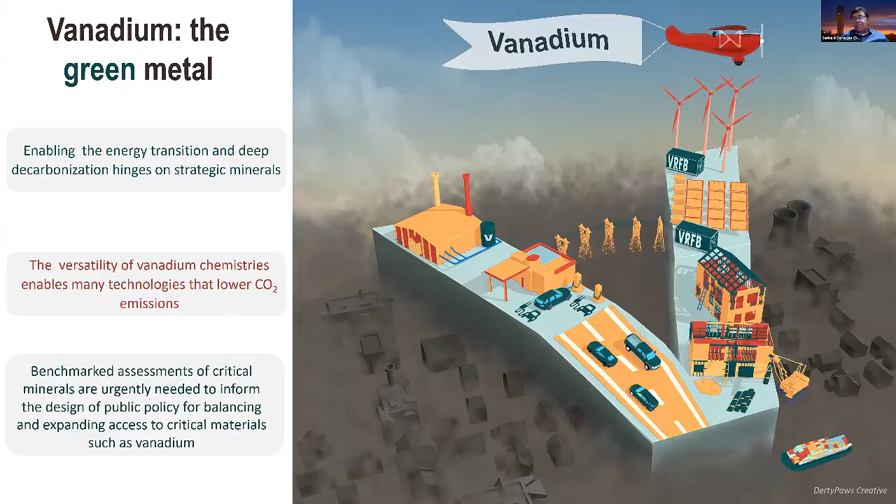Sometimes these technologies are in a bit of conflict, and sometimes there are great opportunities to enjoy synergies across different industries. So I'm going to give you a brief perspective of what we've been studying. Part of the idea is that benchmark assessments of critical materials are urgently needed to inform public policy, so we can expand access to vanadium and ensure a supply for both old industries and emerging new markets—many just coming up on the horizon, especially in energy storage. Vanadium has a critical role to play in the energy transition moving forward.

I wanted to start by talking a little about the role of vanadium. Many of you are very familiar with this, but in case not: more than 100,000 metric tons are produced annually. It's very deeply connected to the steel industry—most vanadium is produced as a byproduct during steel production. There are some primary vanadium mines going online in Brazil and South Africa, and hopefully soon in Australia and China as well.

This is the outlay for how vanadium usage currently breaks down. You can see a massive amount goes into steel. Some goes into titanium alloys, mostly for aerospace applications, some into the chemicals industry, and an increasingly large share goes into energy storage. Primary production of vanadium is still kind of small.

Co-production with steel is very large, and secondary production is over here. But this will be changing as more countries come onto the map. China has pretty large vanadium production, as do Russia, South Africa, and Brazil, but many more countries are coming on board, including Australia, Finland, and Kazakhstan, which will have significant vanadium production as well. The three biggest use areas right now are construction steel, automotive steel, and redox flow batteries—those are probably the biggest.

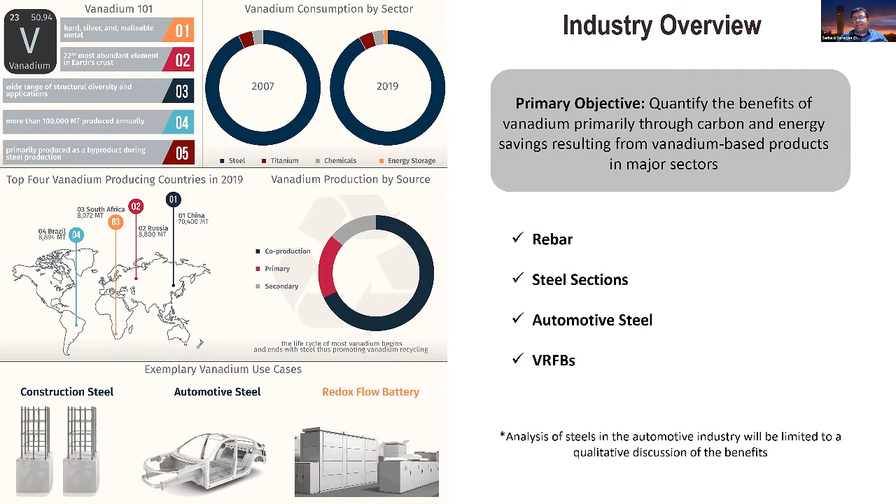Given the scope of the conference, I'm going to focus mostly on rebar and steel sections today. I'll spend a bit of qualitative discussion on automotive steel, and if I have time, I'll quickly go over some data on VRFBs. But this covers about 90% of all vanadium production.

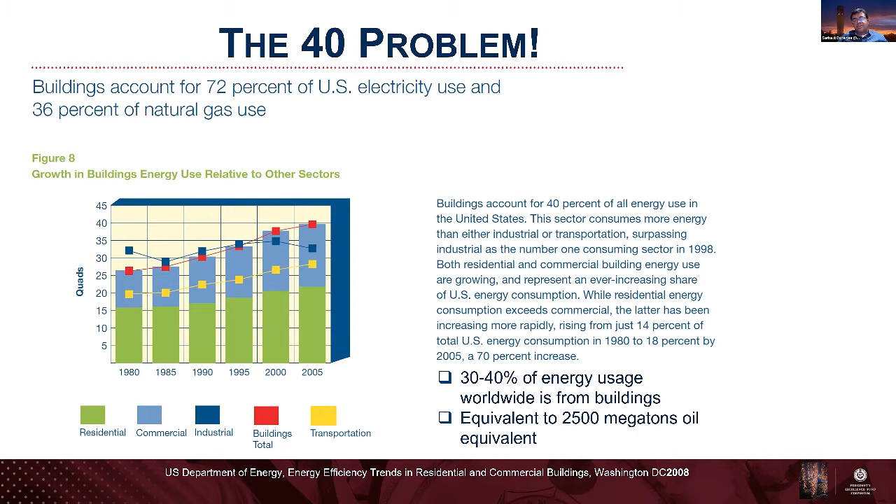So, to take a step back—why do we care about this? It's what we call the 40% problem in the United States: the built environment consumes about 40% of all energy, more than industrial or transportation. This number hasn't gone down, despite worldwide energy usage from buildings being about 30 to 40%. It hasn't really been something easy to tackle. In the US, buildings account for 72% of electricity use and 36% of natural gas use. This is really a large challenge.

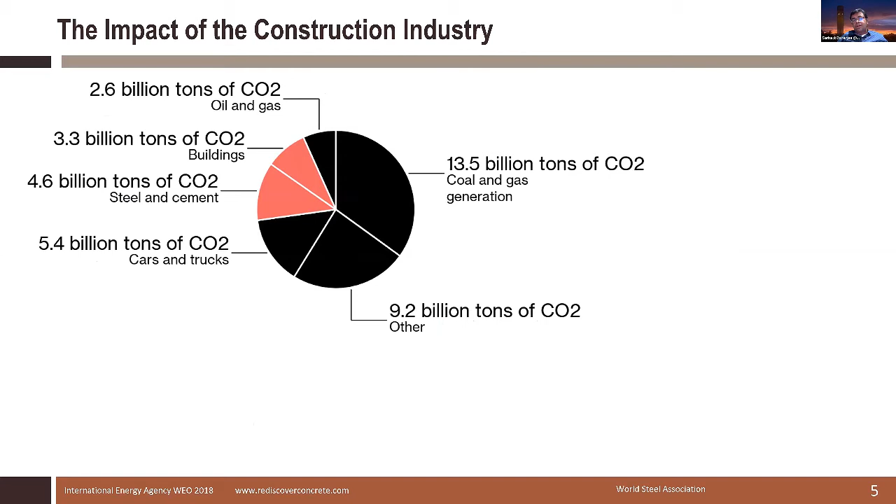Now, it's no surprise—I'm going to show this here—the impact of the construction industry: 2.6 billion tons of CO2, 3.3 billion tons of CO2 goes into buildings. And it's no surprise that you can see here that concrete has...

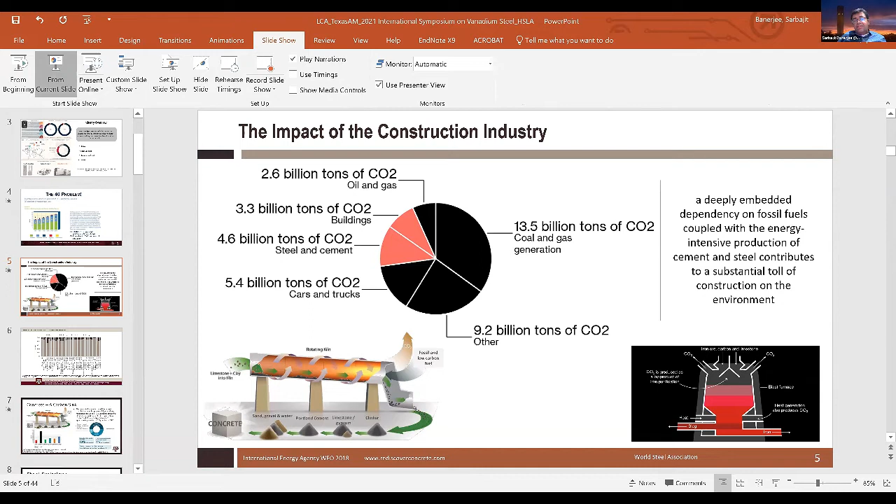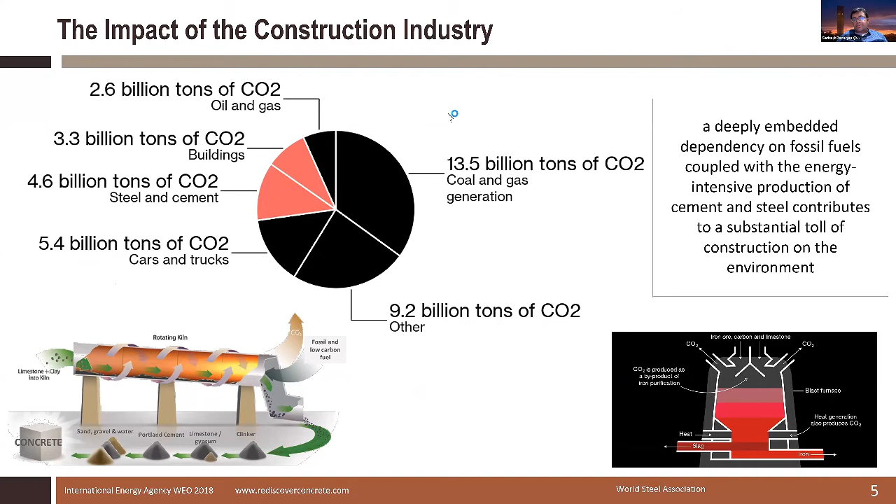Hello, we couldn't hear you. Hello, give me one second, I think my Zoom crashed. Okay, sorry about that. I don't know why the Zoom crashed.

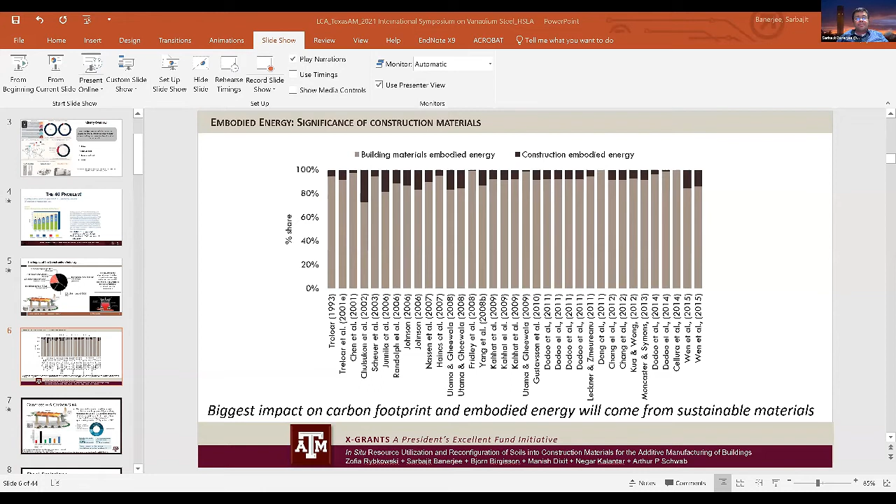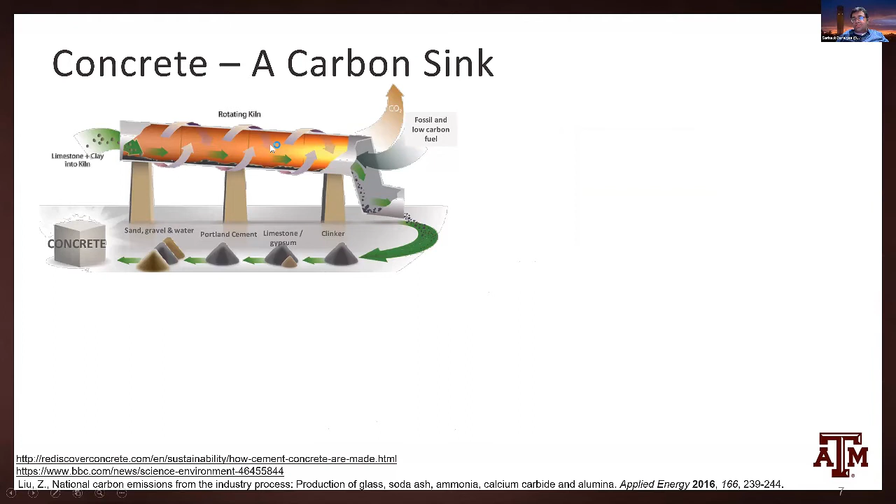So the biggest impact on carbon footprint and embodied energy is coming from the materials that are used, the choices there. Concrete is a big part of this. The concrete industry is one of the biggest, responsible for about 5 to 7% of global CO2 production, from quarrying and transport. Construction related spending accounts for 30%.

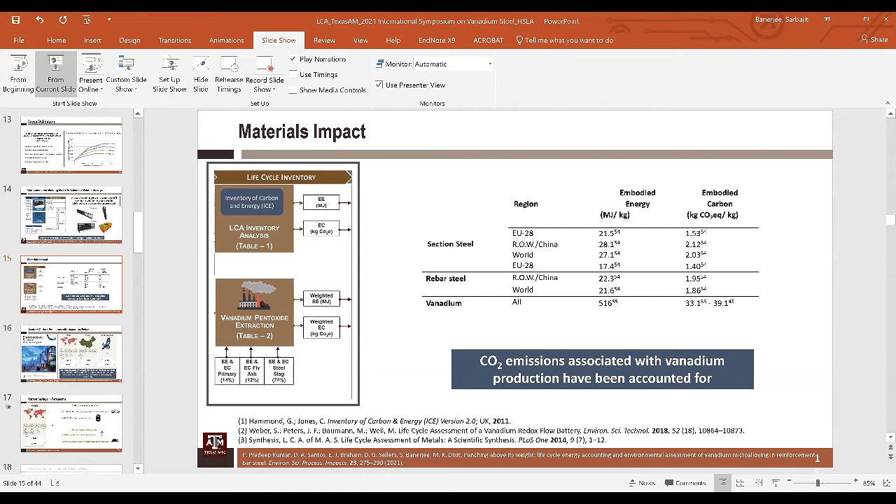Hello. Okay, let's wait a moment. Hello, Dr. Sarbajit Banerjee. Yeah, sorry, I don't know why it keeps crashing. Can you hear me? Now it's okay, can you see my screen? Not yet, okay let me share. I'm getting, okay, alright, okay, give me one second. No problem, take it easy. Yes. Okay give me one second and I will share. Okay, from current slide. We couldn't see anything. Is it working now?

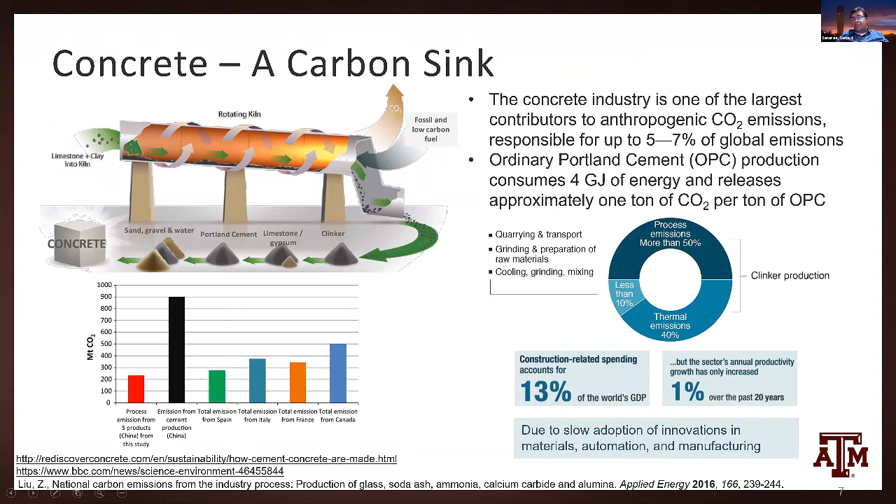Now it's okay. So concrete is a big carbon sink, and this has been a big part of this. 13% of the world's GDP is tied up in construction, but the productivity of the sector has only increased by 1%. This is a real problem because of slow innovation in materials, automation, and manufacturing.

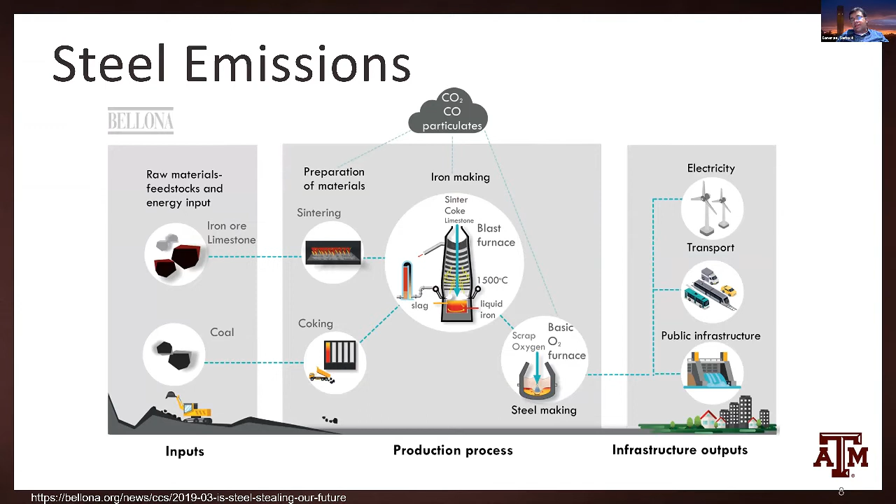Steel emissions are also very large, as many of you know well. This is a huge problem, and it comes from the feedstock, the preparation of materials, iron making.

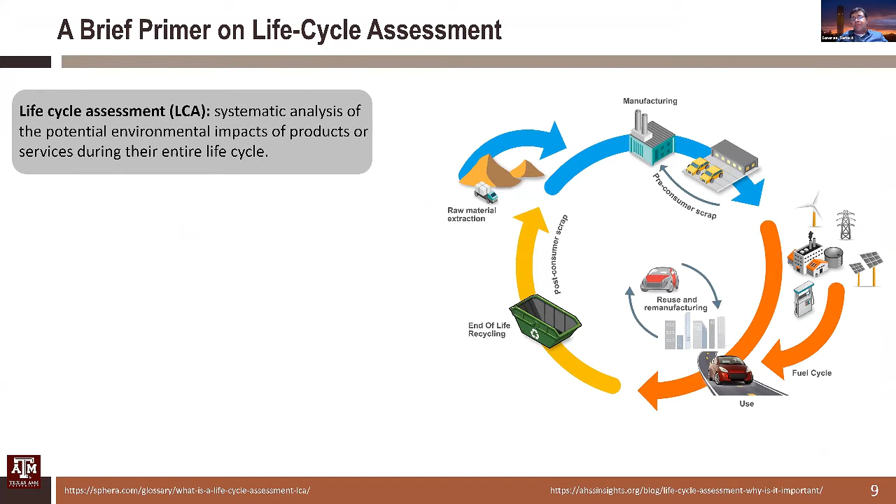What we've done a lot of work on is life cycle assessment, a systematic analysis of the environmental impact. We've carefully selected the system boundaries as per ISO standards, defined functional units, and performed an inventory analysis. We've had a lot of help from Vanitec member companies, acknowledged here, and from CISRI, in coming up with the deep dive into data needed to generate good numbers.

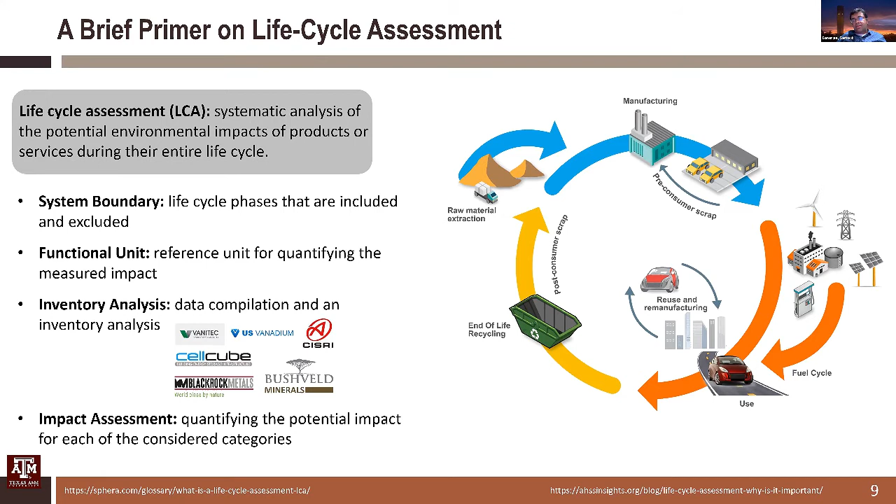We start with some structural modeling, looking at different types of structural steel, either rebar or steel sections. We're looking at vanadium incorporation and how, by incorporating vanadium, you can achieve different grades of steel, and how vanadium microalloying lets you save on the amount of steel required, quantifying the savings in concrete and steel in terms of embodied carbon, embodied energy, and embodied water. Then we can assess the overall impact of vanadium microalloying.

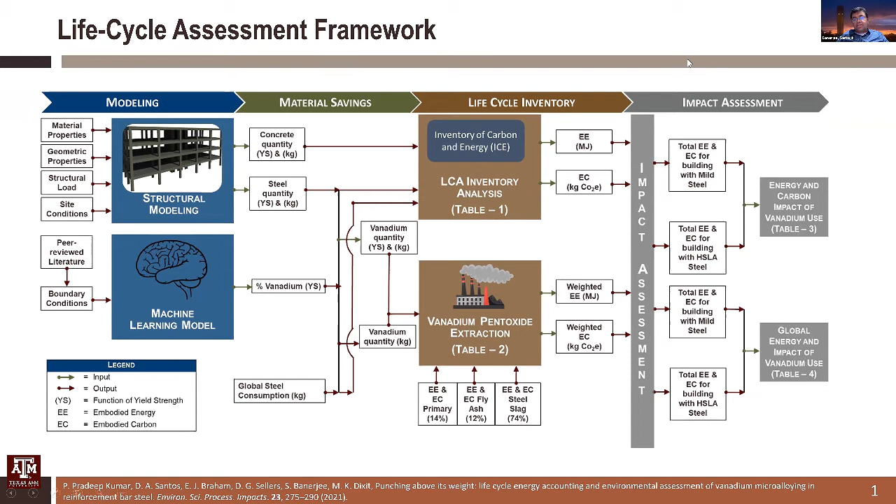So to take a step back, why do we do microalloying? Many people in this audience are familiar with this. The reason we do vanadium microalloying is it strengthens steel through formation of nanoscopic precipitates of nitrides, carbides, and carbonitrides during the austenite to ferrite transformation. Grain refinement is also something you see during the ferrite-pearlite transformation.

The effectiveness is really a beautiful thermodynamic property of vanadium: the excellent solubility of vanadium inclusions in austenite. As a result of the enthalpy of mixing, you have a lot more miscible vanadium in solution prior to rolling, and you can work at some pretty reasonable temperatures. So this is really the reason for using vanadium microalloying.

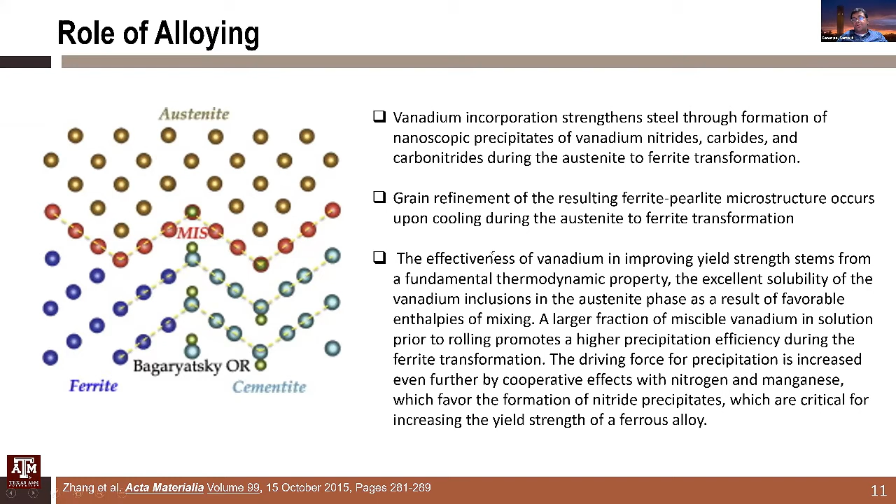One of the things we did is we mined the literature, because as you know, there are many different types of compositions. Each mill has a different composition, and each mill has a slightly different feed ratio.

So we came up with a machine learning model where we fed a lot of primary literature on rebar or steel sections, and were able to come up with models correlating steel composition and yield strength. At different concentrations of manganese or nitrogen, we could develop a multi-dimensional model so that we're not using just the ratio for one company, but using data across the literature.

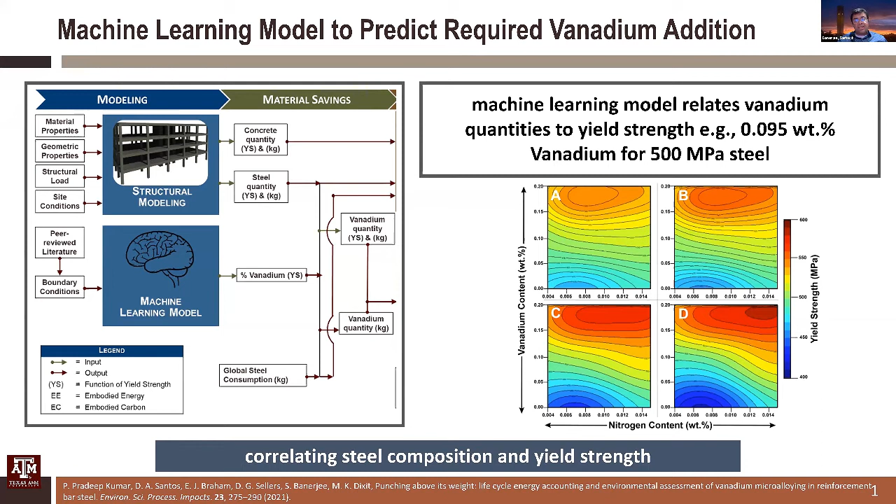So what are the consensus values? We actually came up with numbers pretty close to some numbers Vanitec has reported previously. This is from data from Dr. Glodowski, a consultant with Vanitec, at different nitrogen concentrations. We come up with pretty good agreement with these numbers.

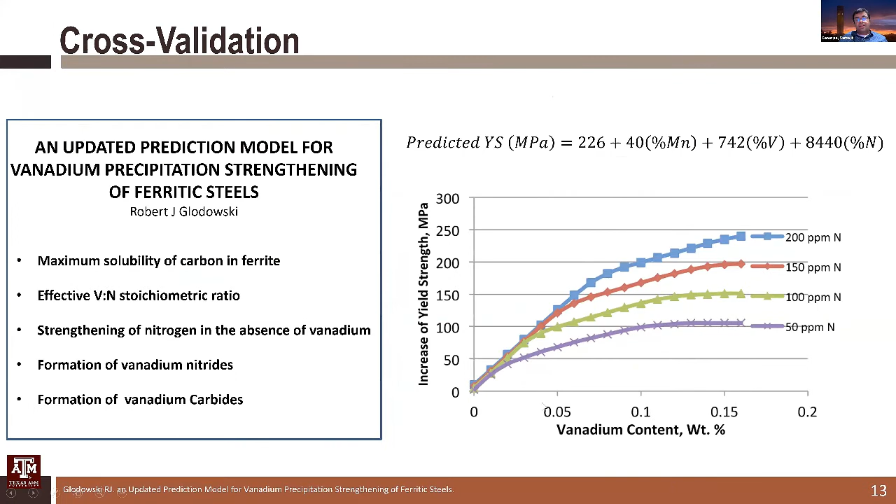So once we have a functional unit correlating vanadium composition and other concentrations to steel's tensile and yield strength, we can then do structural modeling, both at the level of single structures as well as entire building level structures.

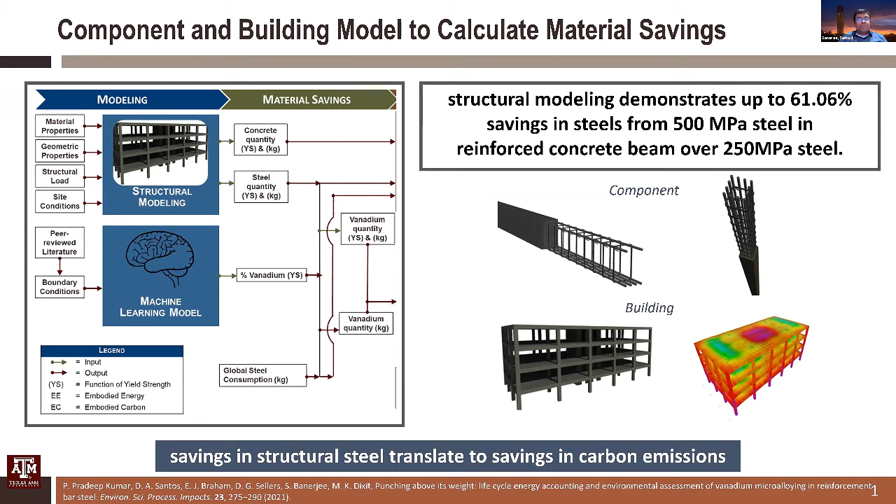And we can figure out the savings in structural steel in terms of vanadium microalloying. One of the things we find is about 61% savings in steel from using 500 megapascal steel in rebar as compared to 250 megapascal steel. This is pretty large, because by using 500 MPa steel, you can design the building very differently and still have the same load-bearing properties and seismic resilience, but use much less steel and rebar, which can translate to significant savings in carbon emissions.

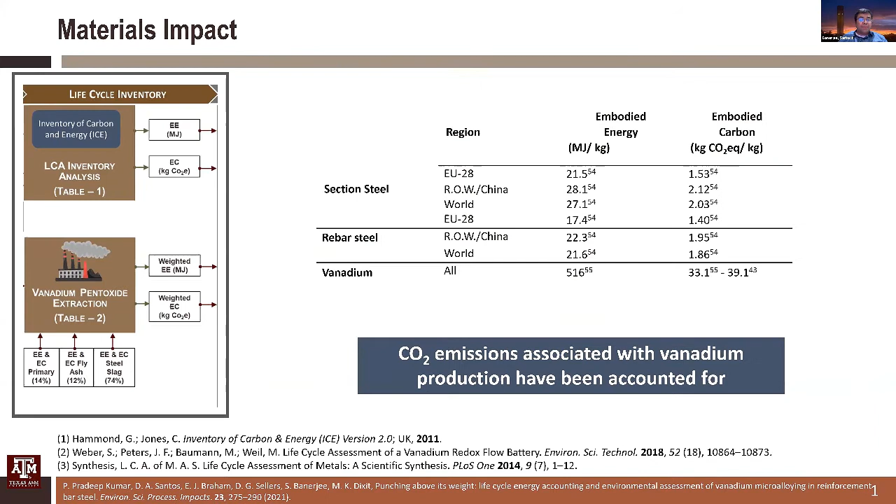We do account for CO2 emissions associated with vanadium production, and we have some pretty good numbers on this. I have to point out these numbers are relatively large, 33.1 to 39.1 kilograms of CO2 per kilogram of vanadium production. This number is rapidly decreasing as vanadium manufacturers adopt greener extraction methods, going significantly lower, down to even single-digit numbers for some new vanadium facilities coming online. As a result, just from rebar, if you extrapolate these numbers and complete this entire framework, we can show that vanadium microalloying, even though it's a relatively small amount, less than 1%, results in about 0.38% global reduction in the total fossil fuel carbon footprint.

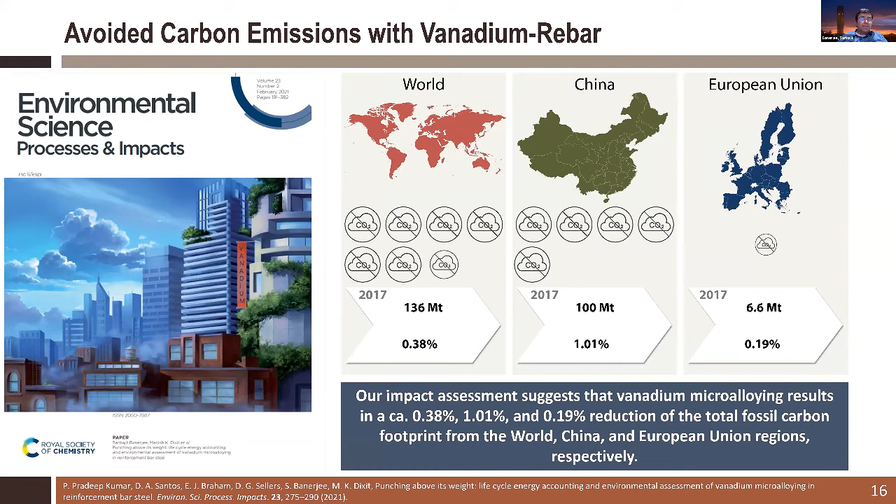And a lot of this is coming from China. Now, I understand that ultimately a lot of this is coming from China because we see... one second, audio feedback.

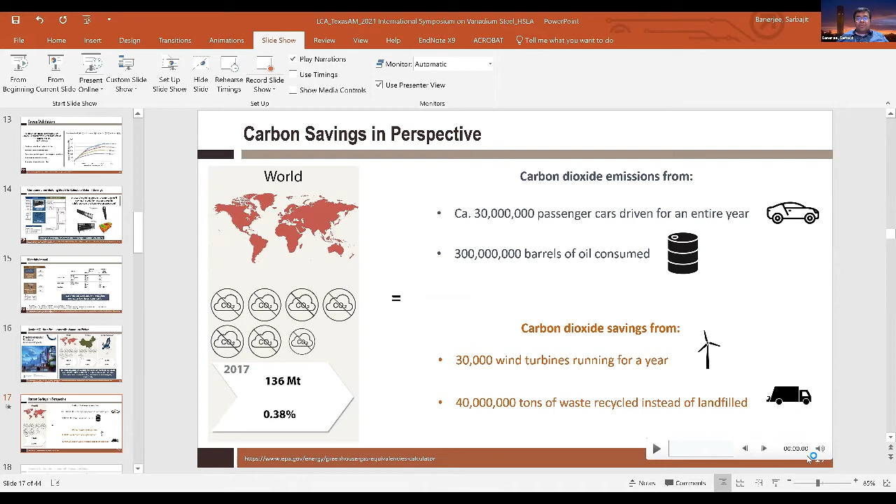Did I get rid of that? Can you hear me? No. Okay, now it's okay. Okay. All right, perfect.

All right, so something I think is really exciting: if we look at the use of vanadium rebar in China, most of you know the story very well. In 2008, the Great Sichuan earthquake led to a series of changes that have had a massive impact on the worldwide vanadium market, and of course the Chinese rebar market.

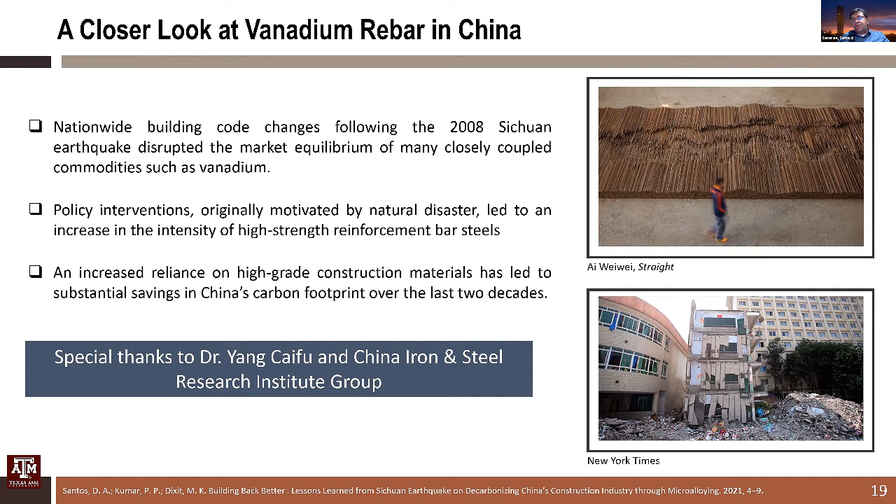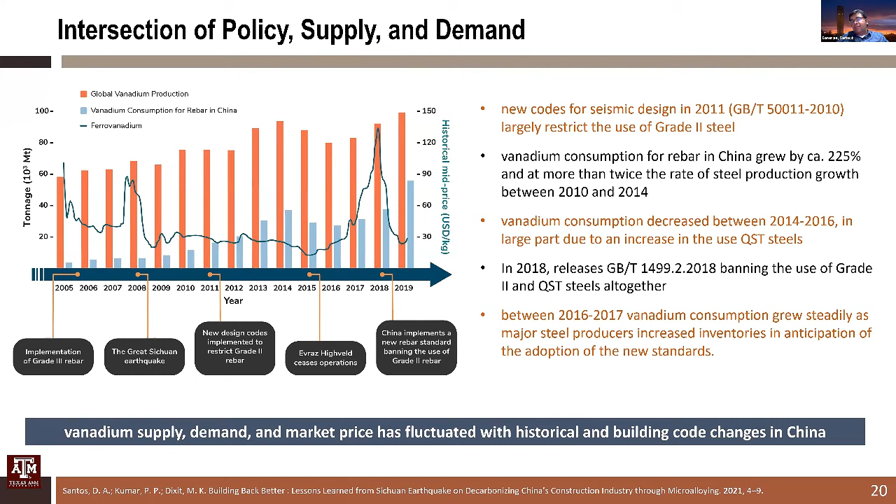If you look at the details here, each of these price spikes correlates with the implementation of the new rebar standard, and before that, the previous guidance on grade 3 rebar. So vanadium supply, demand, and market price have really fluctuated with historical building code changes. Much of this is driven by China, but it has also been a huge driver for the vanadium industry across the world, and this is a great thing.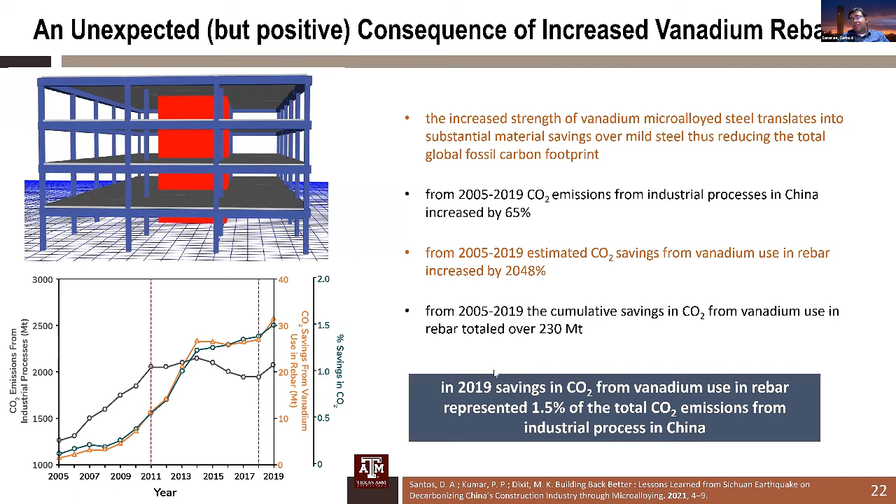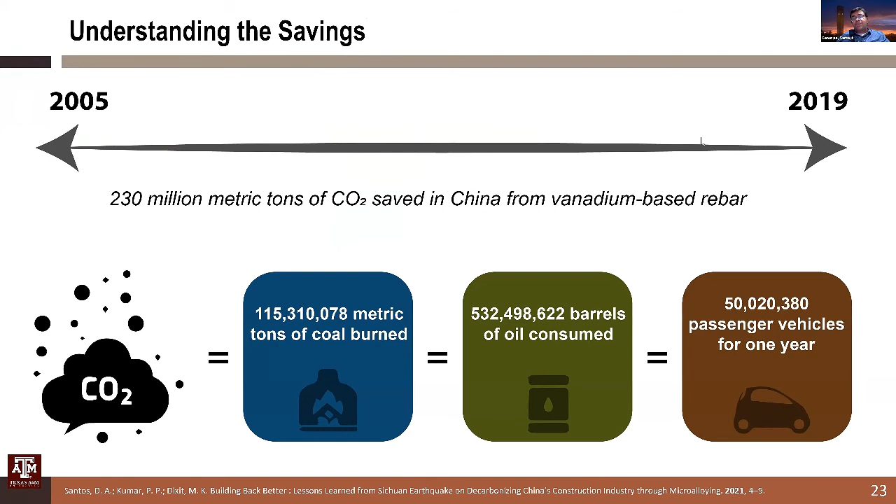And these are some ways to benchmark it: about 50 million passenger vehicles per year, if you think about the volume of the savings here.

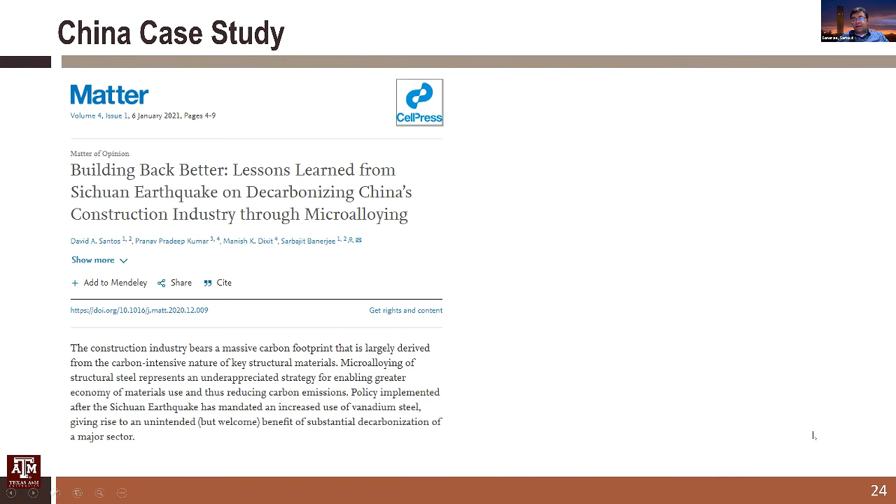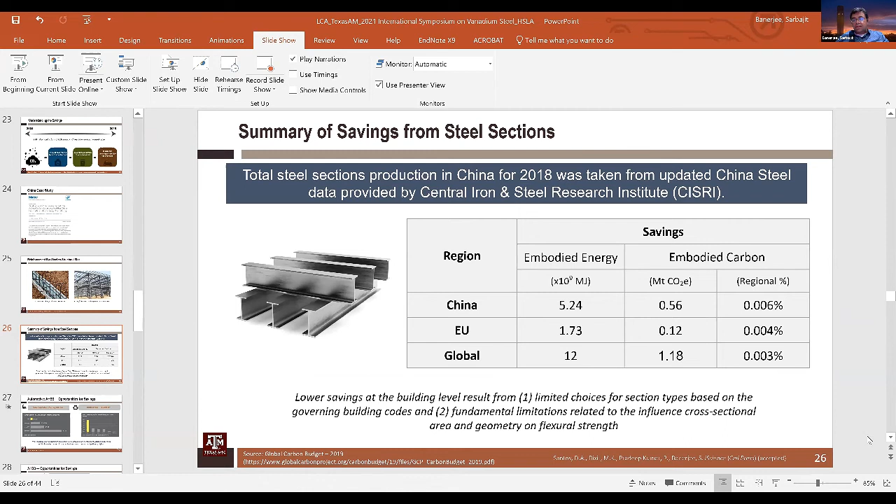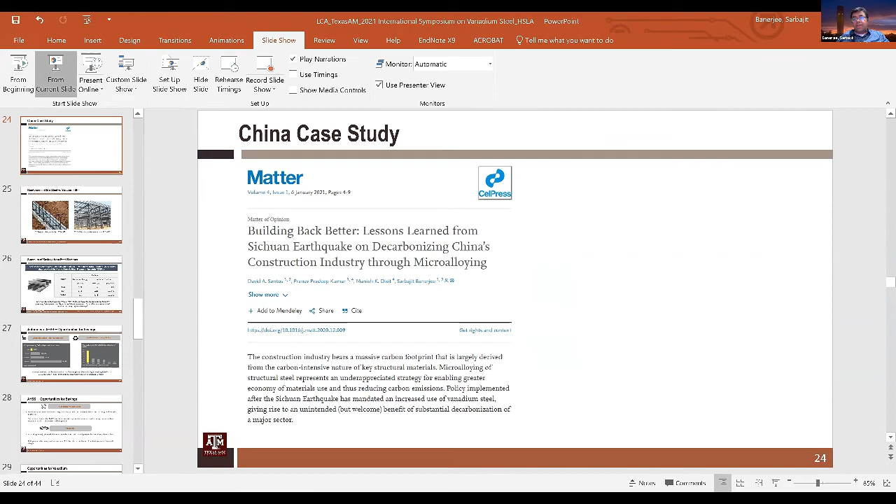Okay, and you can see here, then we also have similar data on structural steel. Again, it's not as big of an issue there. We see some pretty significant savings in structural steel, and the structural steel savings there's limited choices for section types, and there's some fundamental limitations related to the influence of...

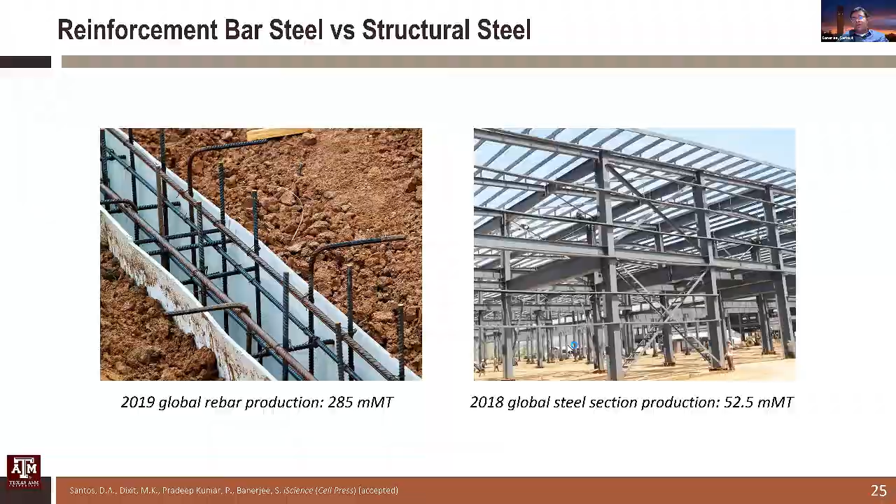Hello, we couldn't hear you. Give me one second, I apologize. This keeps dropping. Okay, no problem. Yeah, let me fix this. I think there's something about the PowerPoint format it doesn't like, but I will fix this and I'll be back in one second. Okay, no problem. Okay, thank you for your patience.

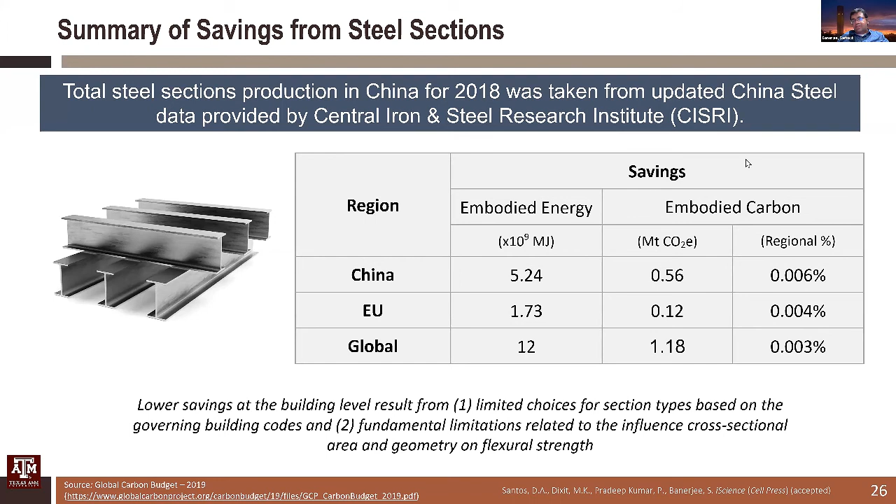Okay, so steel section, this is data provided again by CISRI, and we can look at the embodied carbon and embodied energy. This is a relatively smaller number than the rebar because, as you know, there's relatively limited section types that you can use, and there's some fundamental limitations. You cannot completely minimize the steel in a steel section building the same way you can in rebar, right? So the effect on steel section is relatively smaller, but still a significant amount in terms of megatons of CO2 production.

So this is, I think, a really great story for rebar, and we published a few articles on this. Another emerging area where vanadium is saving a lot of carbon, it's a little bit more difficult to quantify, is in advanced high strength steels for auto applications. Now, there was a big push, as you know, towards carbon fibers, aluminum and magnesium, but the embodied carbon, embodied energy of these aluminum, carbon, and magnesium are very high, and steel can be fully recycled at the end of life. So I think there is a really great benefit to using advanced high strength steel.

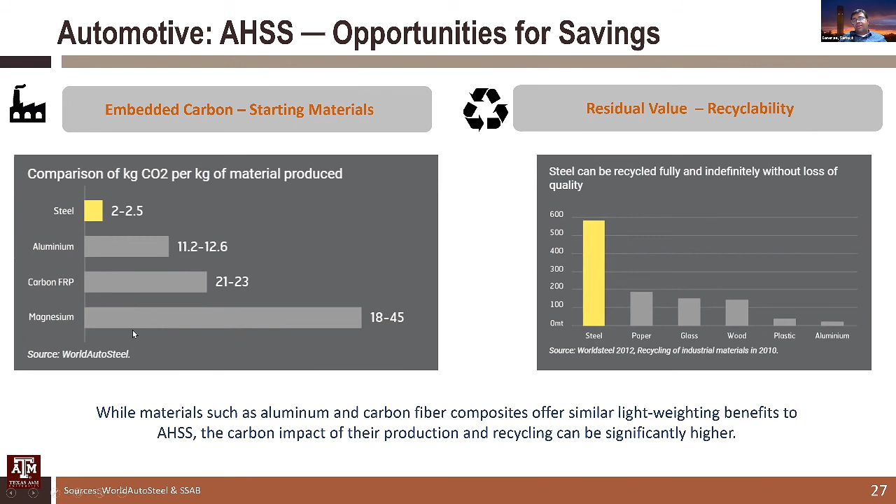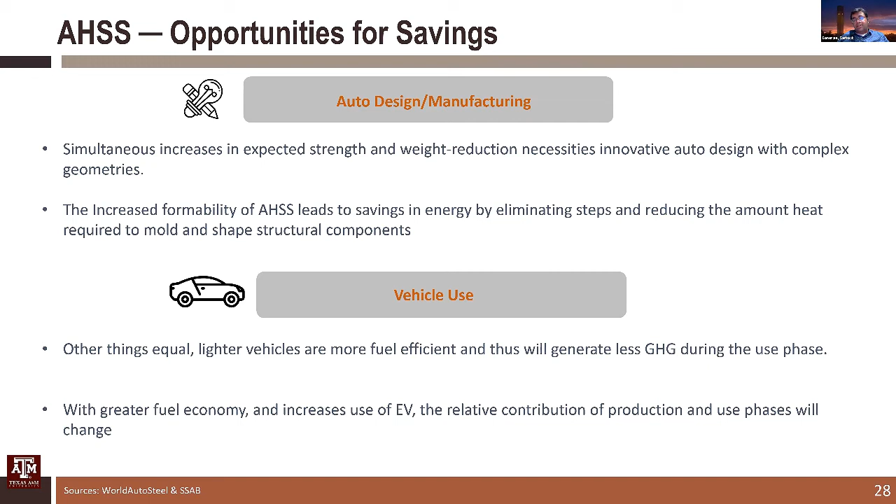And it's expected, it's a little bit difficult to quantify because you expect not just strength and weight reduction gains, but also interesting designs that become possible by using advanced high strength steel that you may not have had otherwise. And the increased formability of AHSS leads to savings by eliminating steps and reducing the amount of heat required. So other things being equal, lighter vehicles made of AHSS will be more fuel efficient and will generate less greenhouse gases, right? So this is what we're excited about.

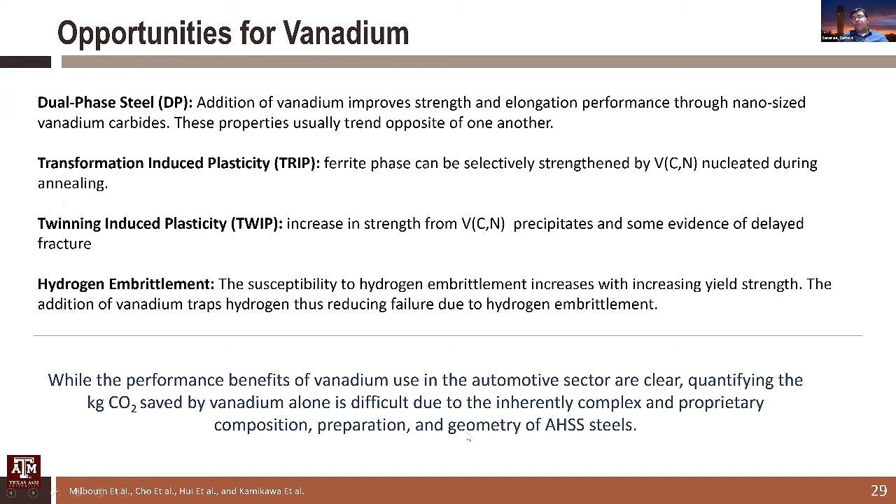And there's really a lot of opportunities for vanadium in dual phase steel, transformation induced plasticity, twinning induced plasticity steels, and hydrogen embrittlement. So there's clear benefits of vanadium use. It's a little bit more difficult to quantify as compared to construction because of the proprietary nature of the steels and the very vastly different areas in which it is used.

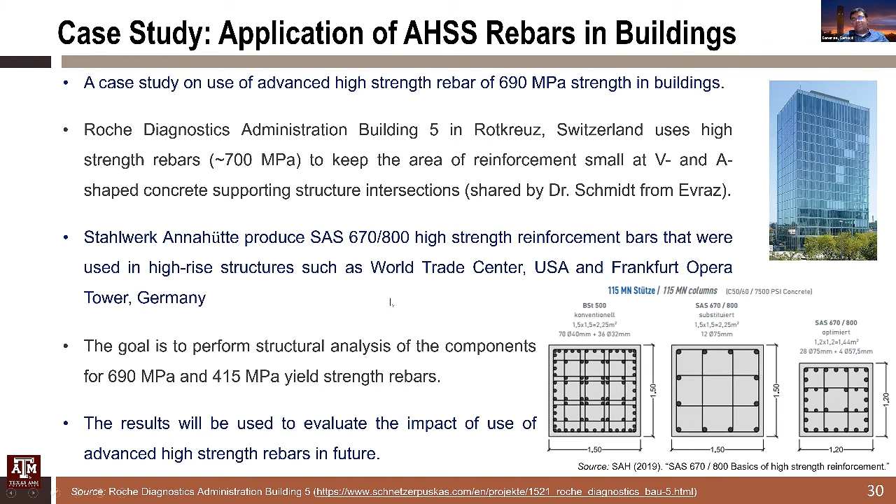And so looking forward to buildings, I think we're also very excited about these very high strength steels that are coming on the market, 700 MPa, even 800 MPa steels. This is the Roche building in Switzerland, an example of this, where we are able to see some really interesting architectures that become possible when you have very high strength rebar. And the challenge is that many commercial building softwares cannot handle it, so we have had to come up with our own designs.

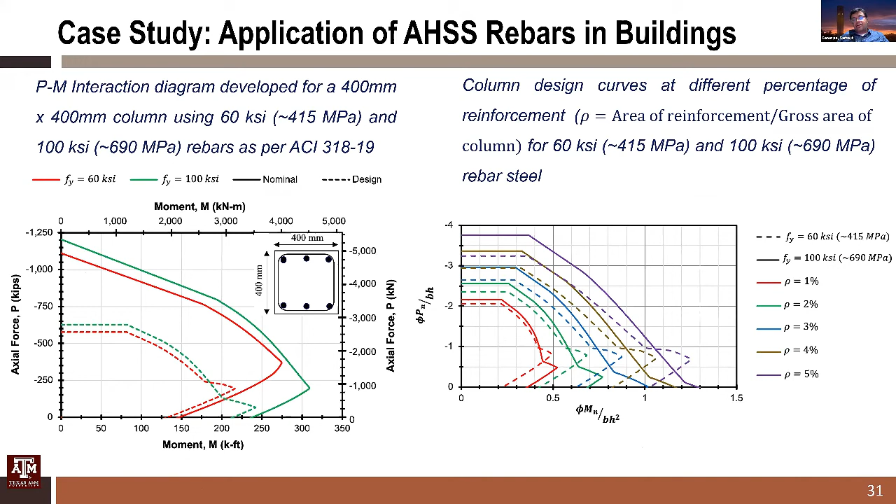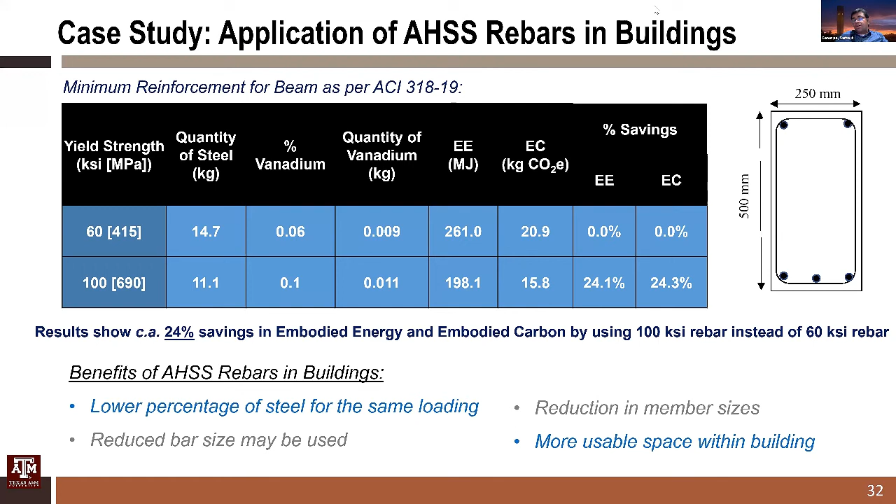This is an interaction diagram that shows the load bearing capacity of some of these parameters and how sensitive they are, and this allows us to start looking at this. And as you can see, for 690 megapascal, we can see even a 24% savings, even above the 415 megapascal, in embodied energy and embodied carbon. So not just the fact that we have less steel, we're also seeing in some of these new advanced buildings in Europe very interesting architectural designs, more usable space, more daylighting, reduced bar sizes, and reduction in member sizes. We're seeing all of these benefits from vanadium microalloying, and this is becoming more and more popular.

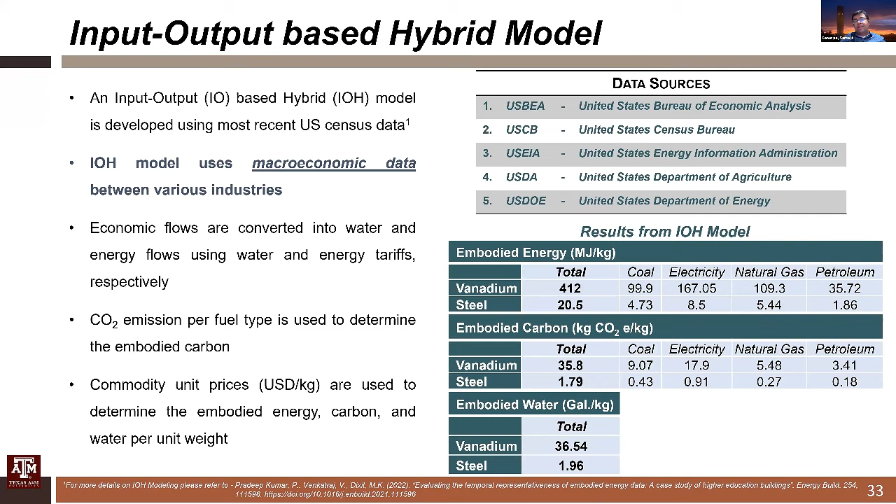Just to give you a brief introduction to some of the work we're doing now, we're moving towards an input-output based hybrid model. Instead of an LCI inventory model that we were using, we're using macroeconomic data for vanadium and steel and such. And one of the things that has come out of this is a really great indication of how much water usage is saved by vanadium microalloying, and it's also very significant.

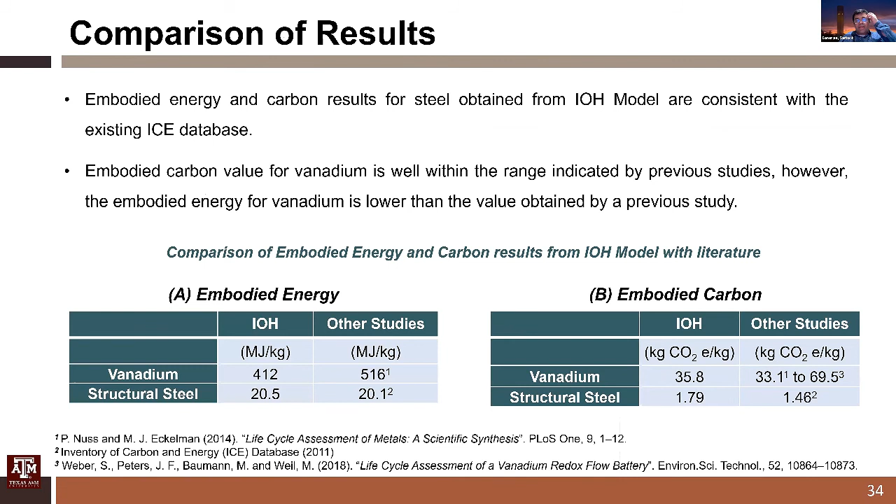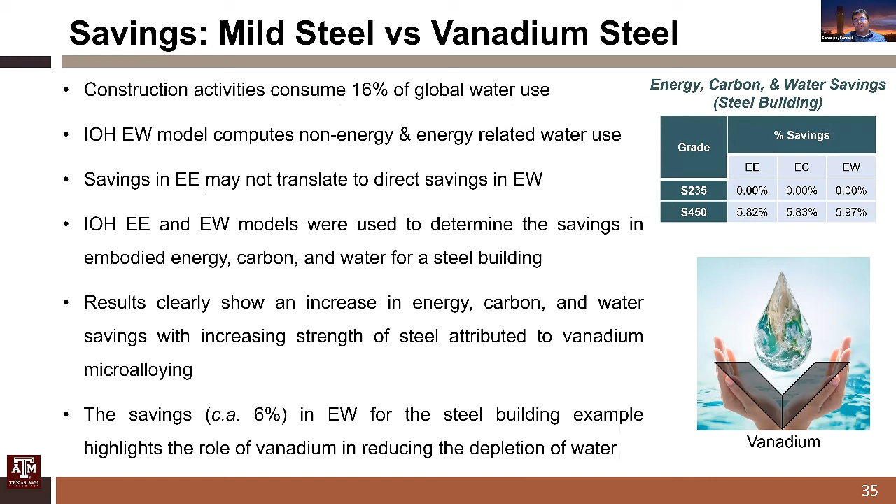So we end up, again, these are some examples of embodied energy and embodied carbon. And we end up seeing actually that the savings in embodied water for steel is about 6% as compared to non-alloyed steel. So there's a pretty large benefit in this.

So these are some articles we have published. If you're interested, please feel free to take a look or take a picture, and these slides will also be recorded and made available. Environmental Science Processes and Impacts - this is an article that we published that has a detailed accounting of the rebar story, the Sichuan earthquake story. I think this is an article written for the popular press, just sort of trying to explain to the research audience how Chinese rebar has really made a huge dramatic improvement in the last 15 years, and how much of an amazing transformation it has enabled in the Chinese construction industry and in reducing the carbon footprint of the Chinese construction industry.

So it's a great story. This is in Matter, and we have recently published the iScience, a comprehensive look across the board at every type of application of vanadium, both in buildings, auto steels, and also in some emerging applications.

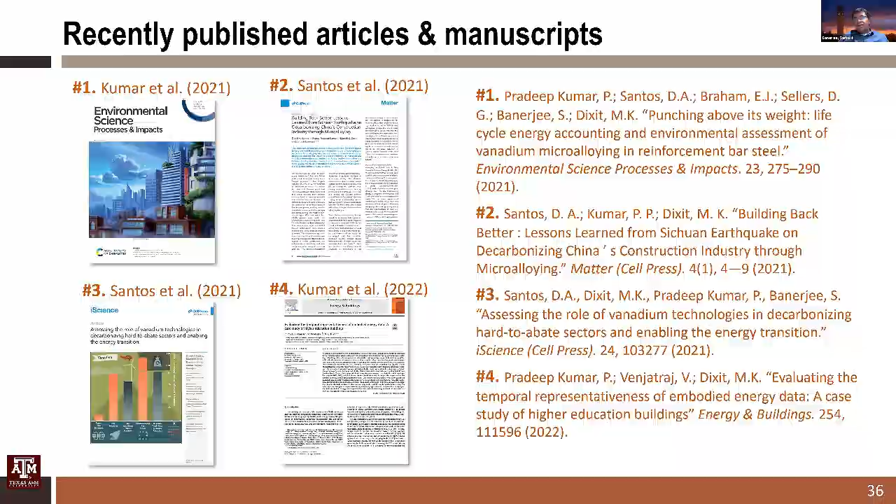And then this is our input-output model, the macroeconomic model we've been looking at. Where we are focused now is really looking towards vanadium redox flow batteries. The price fluctuations I showed you before had a major impact on the adoption of redox flow batteries, because people really need stable prices for that.

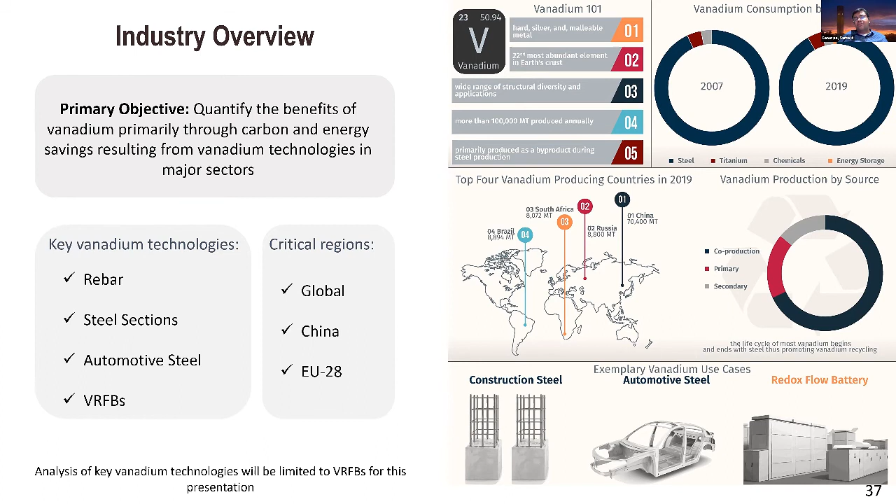And redox flow battery capacity is currently still a little bit small. Vanitec maintains a worldwide database that we're helping them maintain. It's only about 2.13 million metric tons currently, but this number is going to grow.

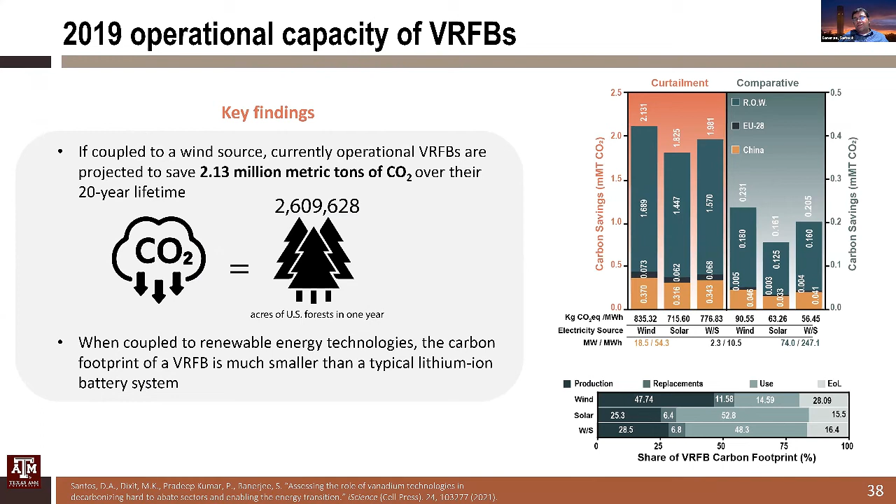And VRFBs are a key part of coupling to wind and photovoltaic especially. This is an example of how many megawatts - you can see we're really poised for dramatic growth in VRFB production.

And again, this is going to lead to some tension with the steel industry, but hopefully the tension will be short-lived. Hopefully there will be new opportunities for vanadium, expanding vanadium access in the industry in years to come, that will allow for some synergies between the old and the new.

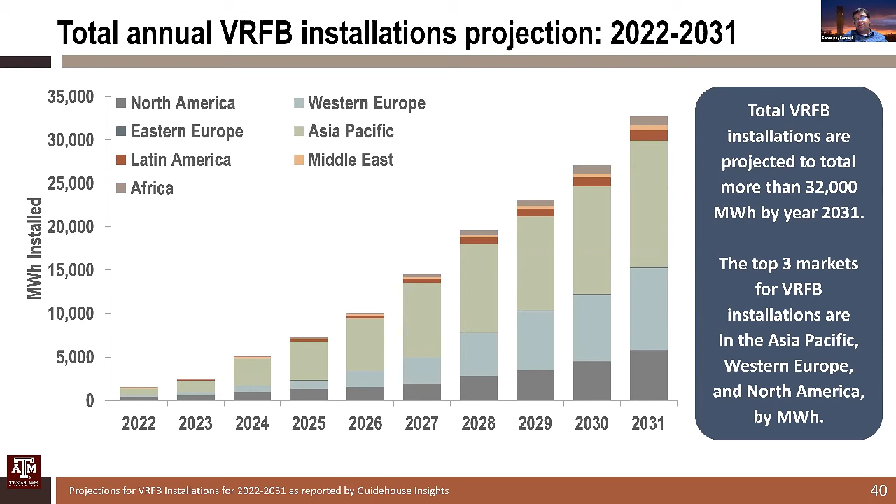I don't want to go over every point, but the environmental impacts have been compared. We've taken projected capacity from Guidehouse, and assuming there are some challenges with VRFBs, the capacity are relatively low, but we can quantify the benefits.

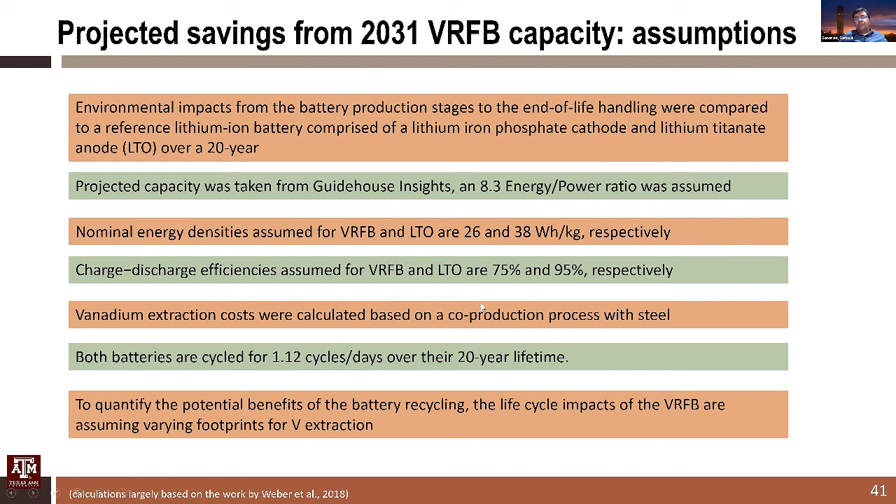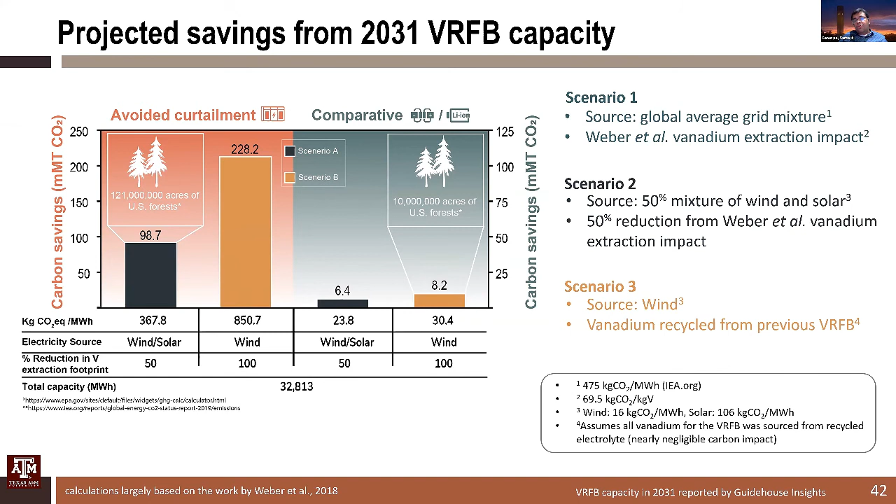As you can see, in the future, assuming 32,800 megawatt hours capacity, we're going to start to see some very significant carbon savings, especially in the scenario where there is no storage, which is really the current situation, where for most wind and for most solar, there's no storage whatsoever.

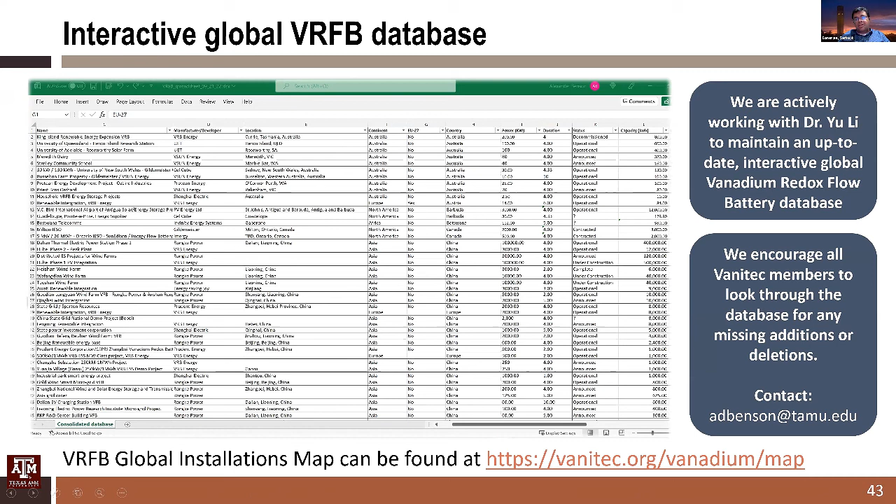So this is a database, and China is expanding rapidly in VRFB footprints. If there is anything we encourage Vanitec members on, we're working actively with Dr. Yu Li to maintain a database, and Dr. Yu Li is also a huge source of information. So please contact us or Dr. Yu Li if you have any information.

So with that, I'd like to conclude and stop today's presentation. Thank you, and I'm happy to take any questions you might have.

Okay, thanks very much for Dr. Benson's presentation. His presentation included a lot of topics. As you know, life cycle assessment is very important, especially I understand for steel industry people. Most people do not quite understand how to calculate it and its real effect in the near future for our steel industry. He also talked a lot about vanadium application in different fields.